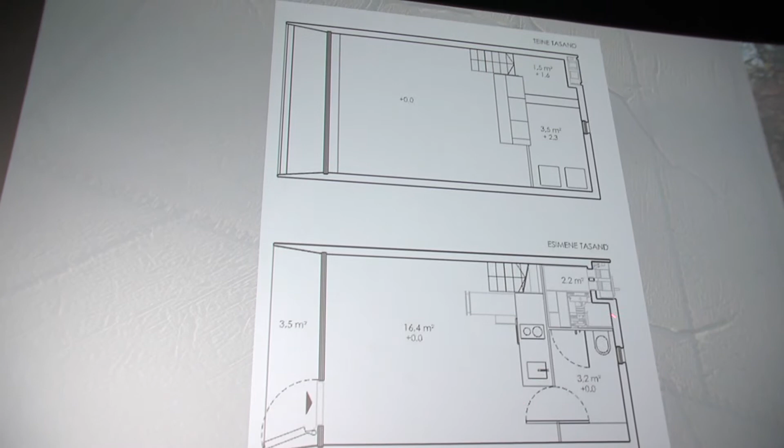That's the first floor. We have an outside terrace, then a living room, kitchen, bathroom and toilet here. And then you go up here, so you can stand on this platform, which is over the technological corner, and then you have beds on the second floor.

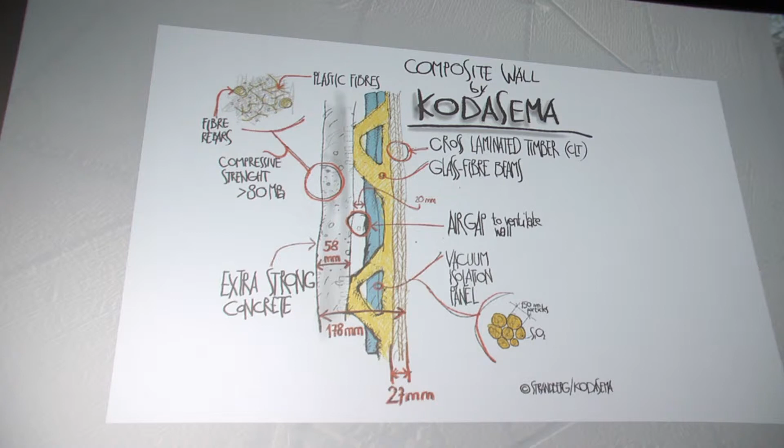So when somebody asks what is the concept of your house, I usually say that yes, we have 15 concepts.

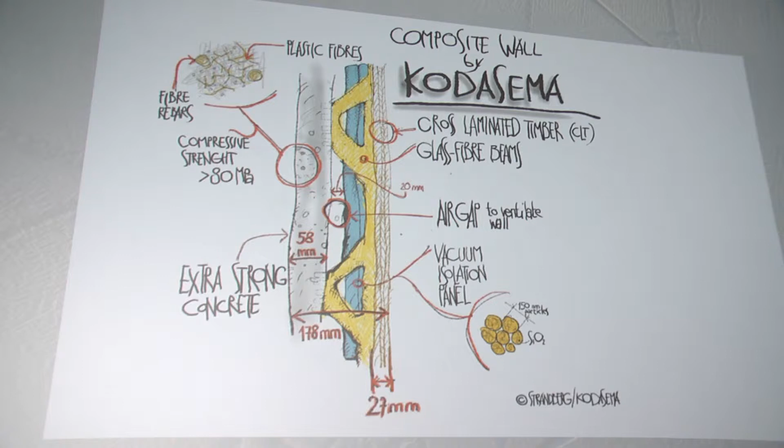I think it's very important that we had the time, instead of making a sketch and selling it, as architects usually do. We worked during 1 year with all these concepts, and we tried to put all these concepts together. One concept is that the wall can be very thin, so we don't need extra finish outside or extra finish inside.

Usually you have layer by layer by layer, and finally you have a beautiful look. So that's the construction: concrete is outside, CLT, cross-laminated timber, is inside, and it's connected to the plastic beam, so it works as a monolithic and composite panel. Inside, in winter areas like Nordic countries, we have a vacuum insulation panel, but in Holland or UK we don't need it, and then it's a usual insulation system. We worked out this panel and all these ways to do it.

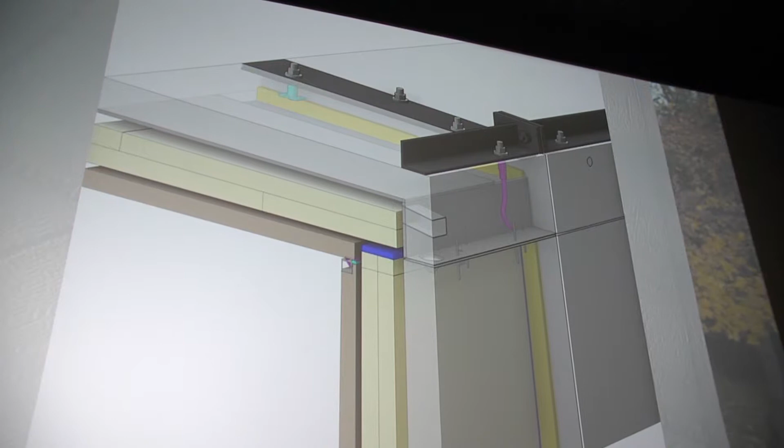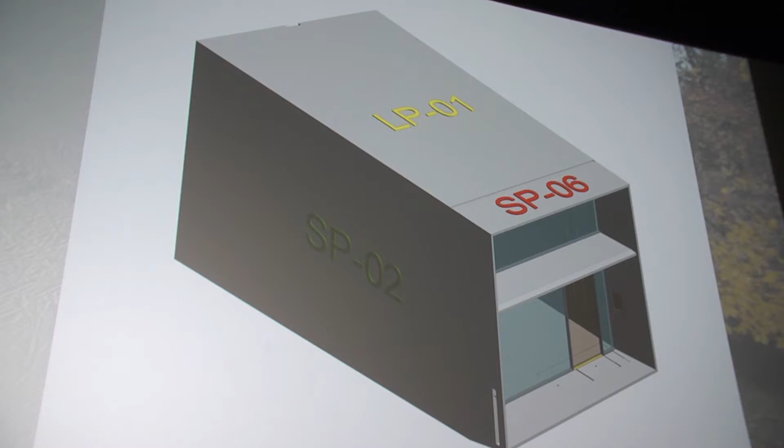Just an example of the corner of the upper corner of the building. So finally we have only a few pieces to talk about: the foundation, the first wall, second, then we have the unit of bathroom and technology in the floor and roof, and this is how it comes out from the factory actually.

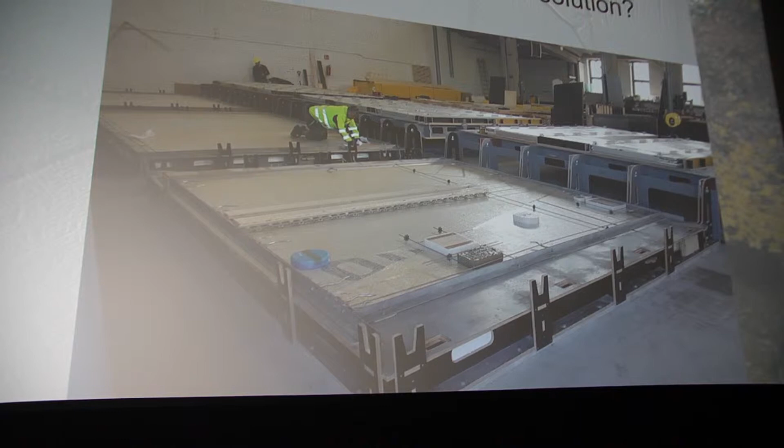The other thing is that the factory is movable, so if we transport 10 or 20 houses to UK or Holland, but if we have 100 or 200 of them, then the factory is specially made so we can move the factory, or at least the heavy part where the concrete is working. These panels are worked outside of plywood, so the concrete will be here, and the cross-laminated timber will be turned into the concrete. But it's a longer story actually.

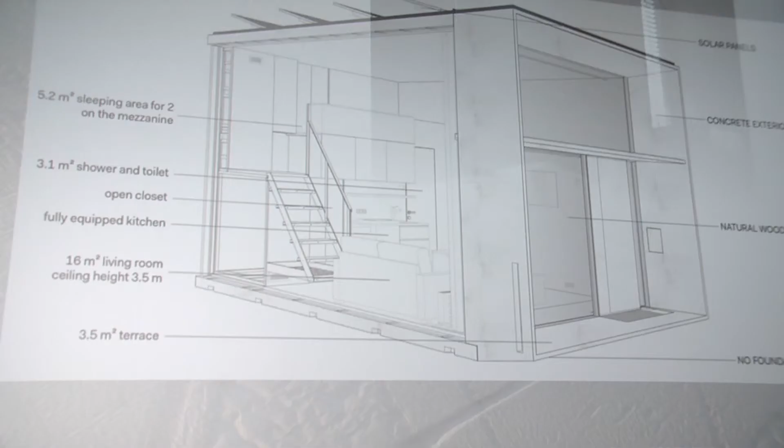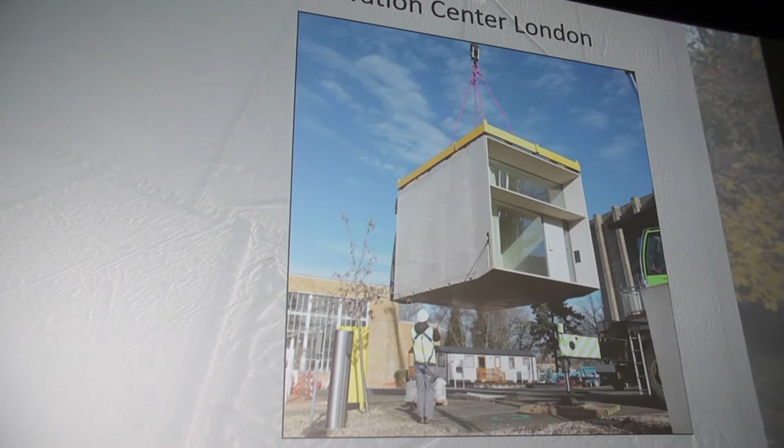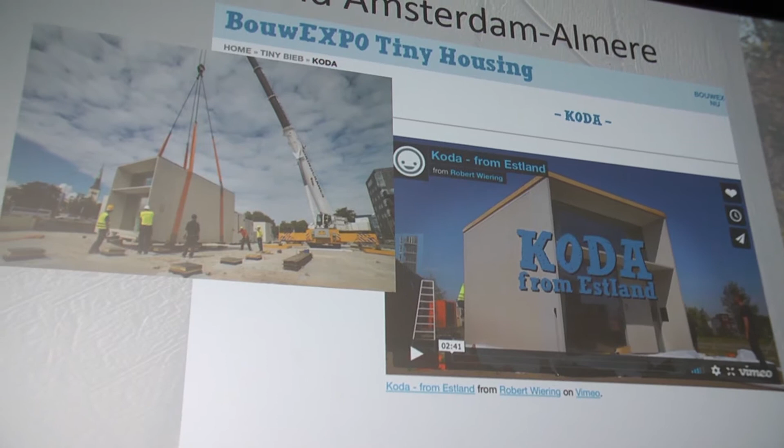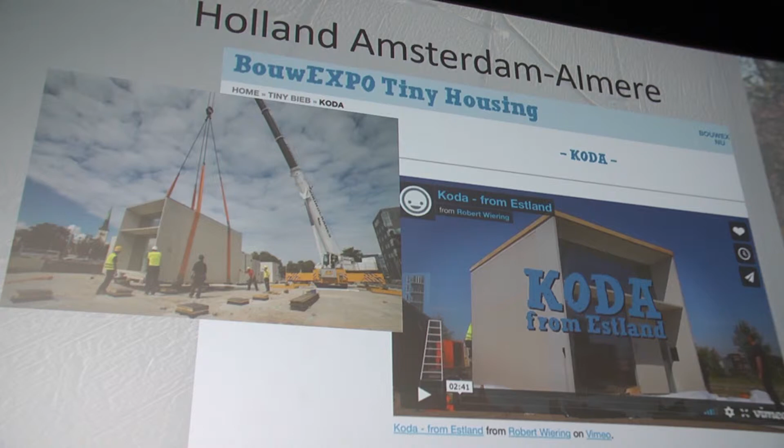Then we have one KODA piece in the London Innovation Center, and one in Amsterdam, Almere. On Saturday there will be the opening of a tiny housing conference, with some 9 or 10 tiny houses, and all the Holland municipalities are now dealing with the possibility of changing the law so these small units can be easily used in municipalities.

The project we opened a few days ago is a parking plot in front of new buildings, in the very center of the city. It took one day to install the buildings, and then 5 days to make all the terraces around, so it's actually one week, and you're just using the car parking space. Instead of car parking, you can have living units.

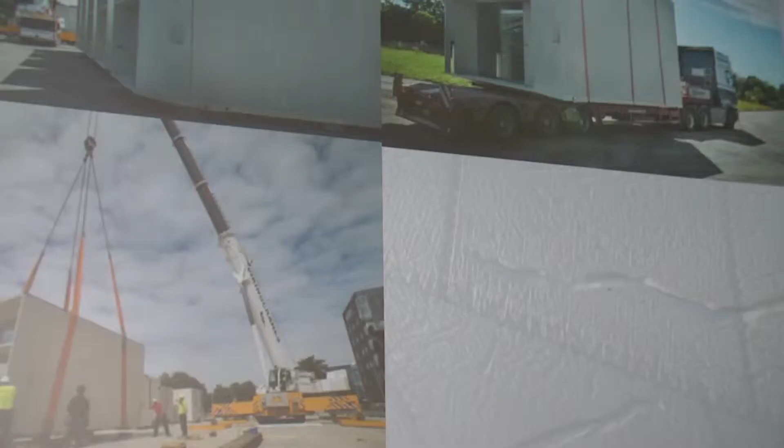That's basically, we call it not building a house, we call it kind of a house taxi, that you ask, sorry, can I have one, and next day you have your house. That's a joke, of course, because it usually takes half a year to make all the paperwork. And that's a really big contradiction, that you're doing paperwork half a year and then in one day you have it.

So people are always asking, it can be a nice piece, but how does it really work business-wise, does it really have some kind of model? So we also made a business model out of it, so that factories are producing and investors are buying these units and then renting to those who are making a business. It means that the foundation or investor will get, at least in our case, 8% yield per year.

And it's important that we have central plots for temporary use, because these are for temporary use. When they have their master plan done, then after 5 years we just move them away. So there is no risk, because it's all one-day delivery, and it's kind of like a car that's getting better and better. I'm not saying that in the first days we didn't have mistakes. The important thing is that we have produced 31 of them. It means that every next building has fewer mistakes, as it works in a car situation.

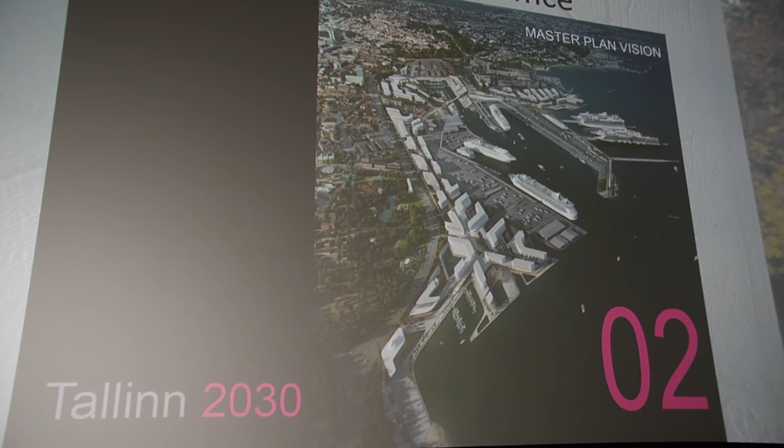That's the point where we're actually talking about next year's project: the old town is here, and the project we're talking about is here, and that's the master plan of 2030. The Zaha Hadid office won the competition, but it all takes a lot of time, and that's why the port is looking for temporary use for a while. So that's the area where we will have over 56 KODAs.

Those buildings are by Zaha Hadid, the new proposal. Of course, these buildings are not going to be built soon, because it's a master plan. The Zaha Hadid office will not build all of them. But this is a kind of first view of the two-story harbor complex. So I would say it's like a village, so that it's in active use. And of course, it's just a glimpse of the thing. As I said, there are 11 different concepts of what we're trying to reach.

Oh, yep, we're also sending one unit to the USA because there are so many inquiries, and why not have this market too, but that's already a more complicated story.